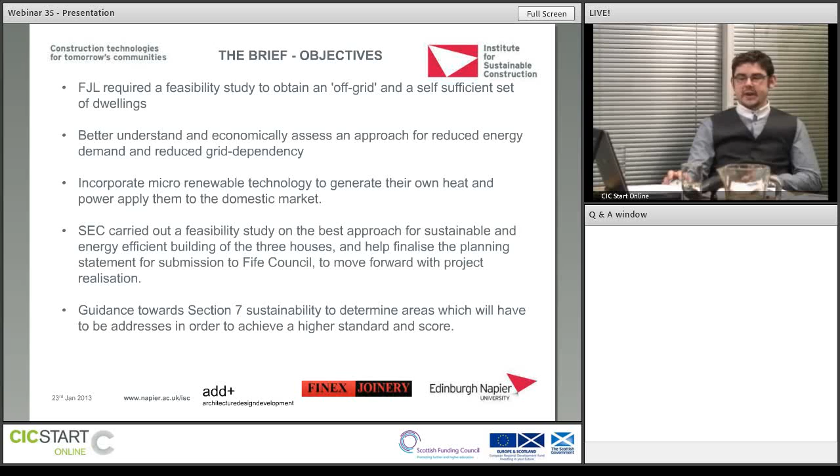So just now I'm going to pass over to Stuart Hannah from Allied Architects, and he's going to go through aspects relating to the site and to the design of the properties. Okay, thanks, John.

The first thing I'm going to speak about is why this site specifically was chosen. Finex are a Fife-based company, and they're well aware of Fife Council's ambition to be a green council, so Finex looked for a site within Fife.

There's several things that were looked at when selecting the site. Many sites proved unsuitable due to the urban setting - there's overshadowing, noise pollution, various issues like this. This site has a very open aspect, with southerly views, making it possible for PV panels, which was one of the first things they wanted to look at.

There is space on this site as well, space to trial different technologies. For example, if wind turbines were something we were going to look at, we had to be sure that it was something we could accommodate.

There are other features on this site as well. There's an existing reed bed next to the site, which is going to come into play as part of the drainage solution for the development. There are also services nearby - there's water on site, and there's also electricity adjacent to the site.

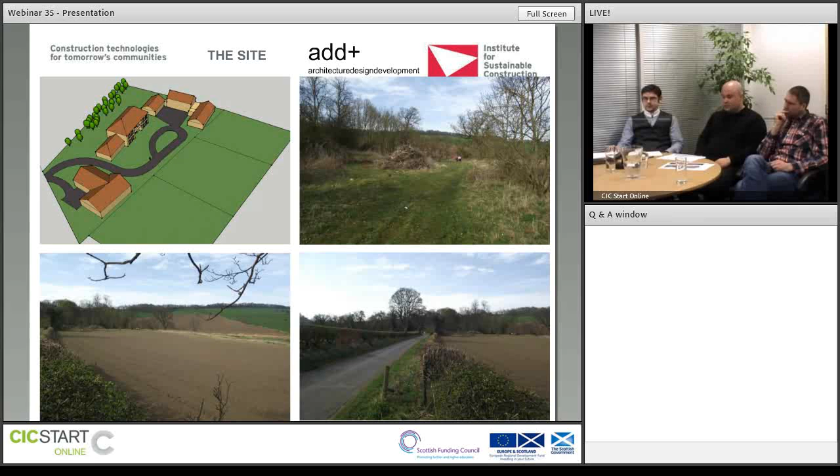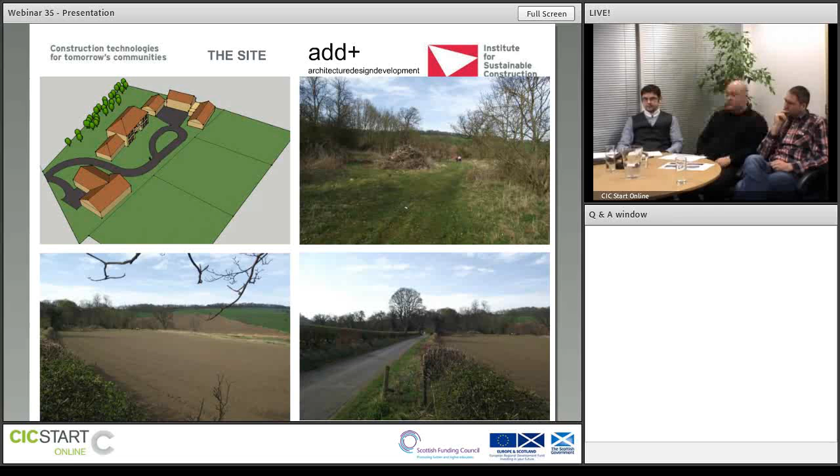The history of the site is quite interesting as well. It's a brownfield site, previously used as a World War II aircraft repair centre. You can still see the remnants of the foundations, although it's been slightly overgrown in recent years. Historically there were 3 buildings on the site, which lends itself quite neatly to what we're trying to trial here - we wanted to reflect the history of the site. There are 3 houses we want to develop, and there were 3 buildings previously on the site.

I'm going to look next at the dwelling design. What Finex were keen to do, and what I'm also keen to support them in, is that rather than having a typical modern looking energy efficient design, they wanted to show could traditional looking homes be built but with the same up-to-date standards and methods. They wanted to create a typical farm cluster which is common in the area around the site, and to fit in with the surrounding area. So really, to some extent, it's a modest approach that Finex were trying to take with regards to the site and the environment.

The site itself, when we're looking at a farm cluster - there's the main house, elevation 1, which is a big house. It would use the Beattie Passive system. There's the big house, there's the farmhouse, again a kind of traditional typology with outbuildings etc., and lastly there's what we've termed the gatehouse, right at the entrance to the development.

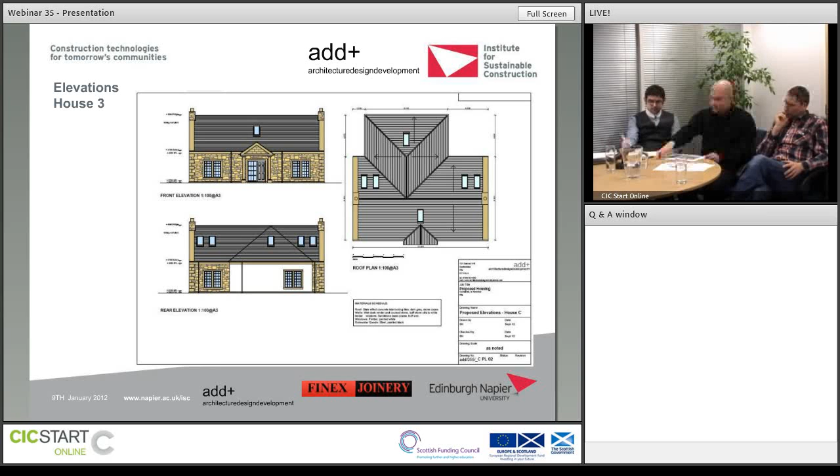You can see the elevations here. Moving through to the arrangement of the cluster - they've been arranged in such a way as to be a typical cluster development, and as I say, in the surrounding area there are several of these already in existence. So we're not trying to do anything alien in terms of its setting, but rather we're trying to complement what's there, while at the same time doing something thoroughly modern and, as far as we understand it, unique at the moment.

So I'll move on to the building systems which have been chosen. The first system, for the biggest of the houses, is the Beattie Passive system. The farmhouse is to use the SIPs panel system, and lastly the third method selected was an augmented timber kit. I'll just spend a moment talking about the Beattie Passive system.

It's a system relatively new to the market, and there have been some houses finished in the Fife area using this system. The main feature of the Beattie Passive system is the continuous building insulation envelope - as far as I'm aware, only the Beattie Passive system has this. It's the lack of, or minimisation of, cold bridging which is its main feature. It is also a certified construction by the Scottish Passive House Centre, and it was the first system, as far as I'm aware, to achieve this accreditation.

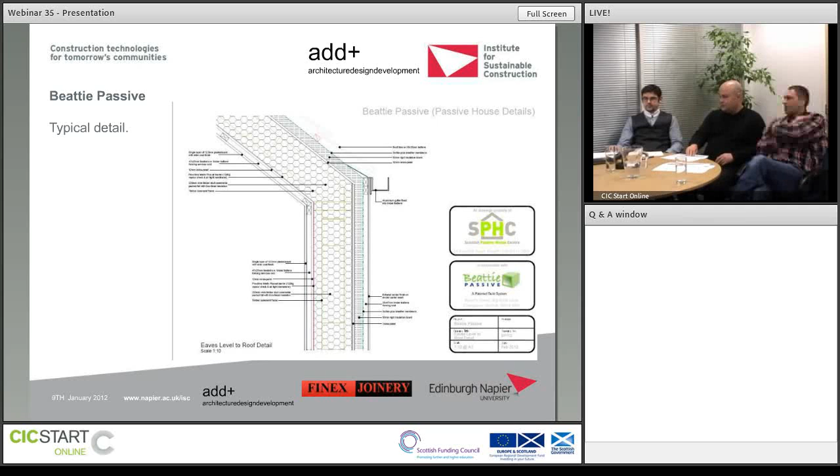So that's what we're going to be using for the first house. There's a slide showing a typical detail through the building envelope, and as you can see, from roof to wall, there really isn't much different. It's a continuous building insulation envelope, timber frame, or a variation of a timber frame with a large void which is filled with insulation.

The next system to be used, on the second house, the farmhouse, is the SIPs panel system. Again, it's not as new to the market. In fact, there have been SIPs systems built in this country for around 40 years now. The main feature of the SIPs system is it's an off-site prefab panel system which would minimise construction time on site. Again, it has high insulation values, as does the Beattie Passive system.

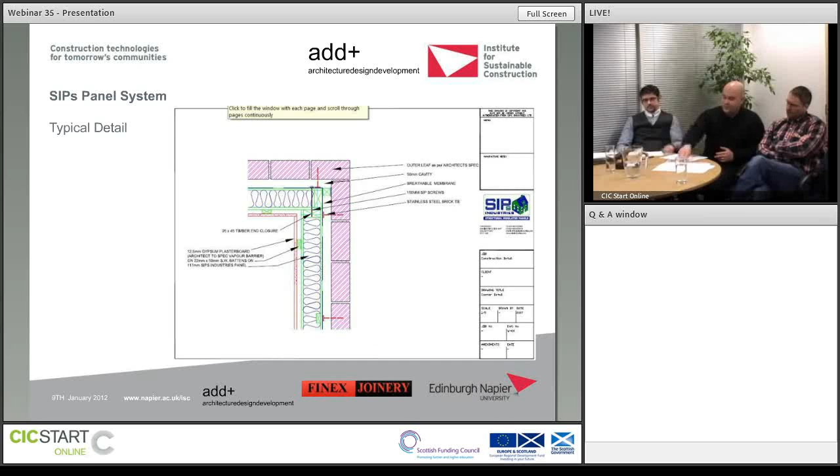The last system we're proposing to use would be an augmented timber kit system. The reason for using that was that timber kit is fairly traditional in the area we're going to be building in. It's a construction technique most are familiar with, so really what we're looking at is taking a traditional timber kit system and augmenting it to a level where it has a higher insulation value. In this case, we're proposing to have an offset stud, again to increase the insulation void.

In the case of all three systems, what we're looking at also is very good airtightness. So really, in terms of the building, the main drivers in design common to all three systems would be good airtightness and good thermal insulation.

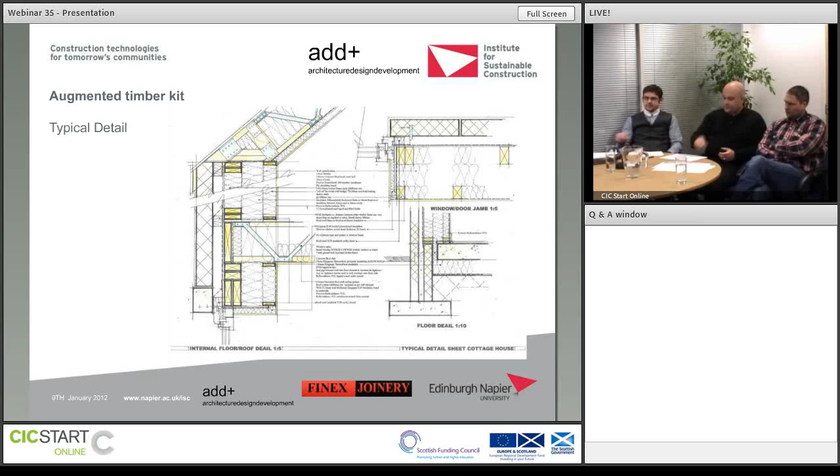Before I hand back to John, I'll quickly tell you about the need for the study. The first thing is Finex were looking for independent expert advice, and they were introduced to Napier University through Fife Council's Building Standards Department. They were aware of lots of claims on performance and wary that some of these may be sales driven for the various sustainable technologies out there.

So really what they were looking for was an independent voice in the midst of all the choices that were there. Initially it started as an aim to build an energy efficient home, and then it developed into a desire to be off grid.

As Finex, and many of us, are new to this type of technology and unaware of everything available, they thought it would be good to turn to the Institute for Sustainable Construction to look into this with us. But we would also be unable to predict how these houses would perform, so we're interested in a feasibility study, to assess whether the site was suitable for some or all of the technologies out there, for example wind turbines, PV panels, that sort of thing.

I'll hand back to John now, who I think is going to talk more about the report. Good job, thanks Stuart.

I'm going to go through briefly the methodology set out for how we were to investigate these three dwellings that Stuart had designed. Essentially, Stuart had adopted a very strong fabric-first approach to all three dwellings, as you've seen from the slides.

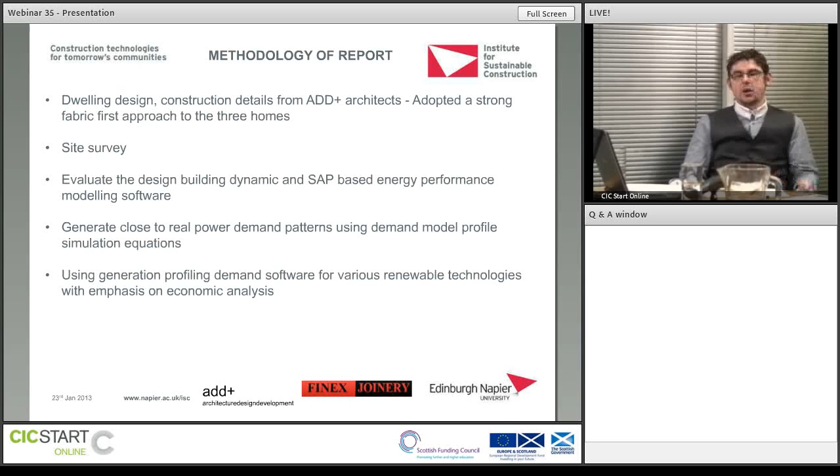So once we arrived at the site, as Stuart mentioned, we established that there's no immediate mains gas or electricity connection, so we were looking essentially off-grid.

Looking around the site and seeing the lie of the trees and the local surroundings, we could rule out a number of technologies pertaining to wind and hydro, for example.

We also had access to an adjacent site to where the houses are proposed to be built, and this site was going to be able to house technologies and allow for maybe a much larger farm-type establishment of different technologies.

And the report then speaks a bit about the foreseeable issues relating to living off grid and the challenges of providing sustained, continuous electricity supply to a house all day, all year long.

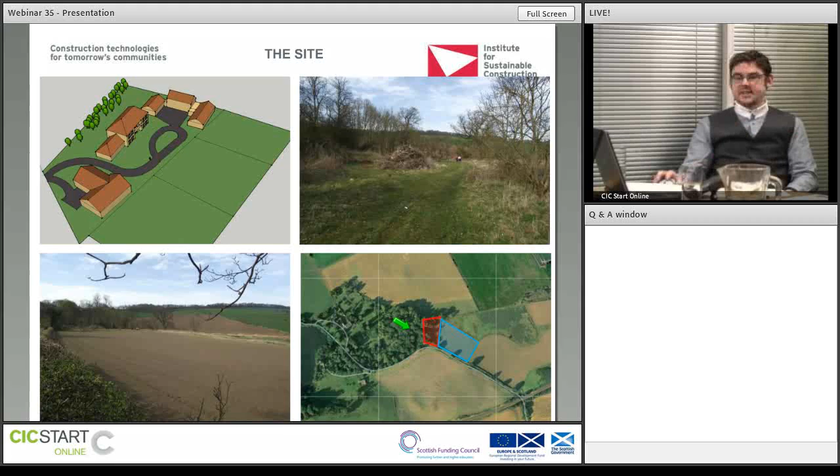And the reason I mention this is our feasibility study was essentially looking at the first three aspects. This slide has changed - anyway, we have the first 3 aspects, which I don't seem to have here on my slide for some reason. The first 3 aspects relate to the carbon dioxide emissions based on the DER against the TER.

Aspect 2 is the space heating requirement, kilowatt hours per metre squared per year, and the third aspect was generating hot water based on renewables or recovery on site. So out of the 8 aspects, we looked at those 3 as benchmarks of performance to compare the 3 designs, and we omitted the other 5 aspects because they're more design based - looking at acoustic performance, materials selected, low flow water taps, accessibility, and flexibility of design space, which is really within Stuart's remit. So we were looking specifically at what those buildings were in those 3 aspects.

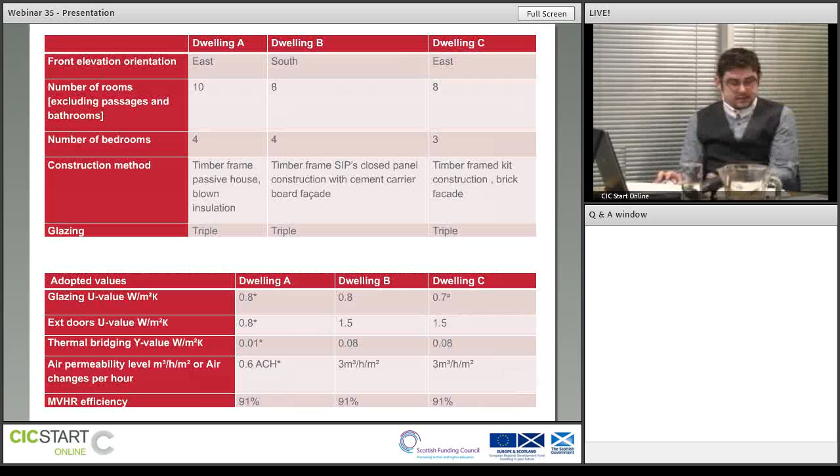There we go, that's the reason why I missed a slide. So these are each of the designs that were put into the modelling software. The parameters or categories based on each individual building component, or the U value, whatever it may be, was either pre-selected by Stuart or by Drew about what the value should be for the openings, the doors and windows, or what the air tightness level should be, or whatever relating to those.

Dwelling, the first dwelling we have marked as dwelling A, was that property designed under the Passive House standard that Stuart mentioned. Passive House has quite a rigid design parameter when it comes down to heat loss, so those values chosen in the bottom table come from what the design standards were within Passive House. The values chosen to design, to virtually construct the models for B and C - what I really want to focus on here is our thermal bridging and air permeability levels.

These are values that can essentially be manipulated, or kind of massaged if you like, within different modelling programs. Based on these values, you can essentially hit or miss a gold level standard by a couple of kilowatt hours per year per metre squared, based on what these values are. The values we chose for B and C under those parameters essentially come from what we have experienced in our post occupancy evaluation or building performance evaluation.

Their air permeability values, for example, were set at 3, and that essentially comes down to what we think, from what we have experienced, can be achieved realistically on site using modern methods of construction. These values will also have to be proven through completion testing. So the values put in here can bring down your annual consumption and heat demand, but also need to be justified at the end. The values here for thermal bridging were also set within what we expect to see, constructed simply on the back of virtually building these up within a certain modelling program.

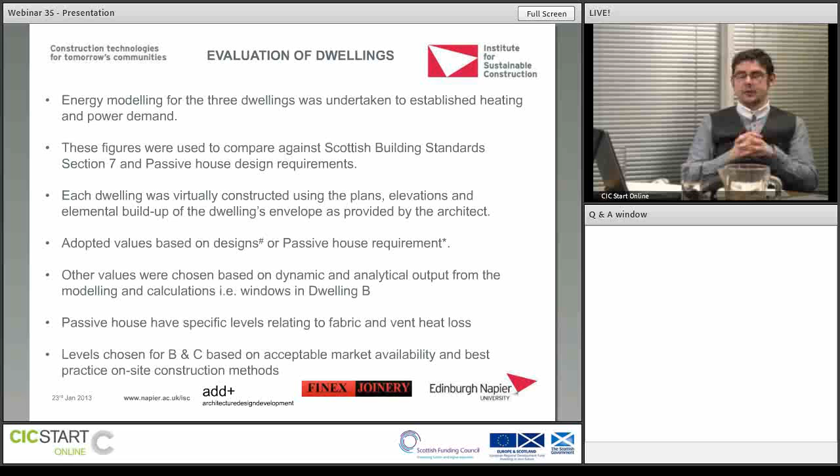So, like I mentioned before, we virtually constructed the 3 dwellings in 2 pieces of software. One was a dynamic modelling software, the other was an analytical or numerical piece of software. We noticed the outputs from both types produce slightly different results when it comes to the space heating requirement - the numerical modelling produced a much lower value, whereas the dynamic modelling produced a slightly higher value for various different reasons. That outcome influenced the rest of the feasibility study. We'd foresee the dynamic modelling being quite close to what we expect when the houses are constructed and how they'll perform, but ultimately it's the numerical modelling which is going to be used to achieve Building Standards Section 7, and that's what's going to be compared against what the houses consume. But we were using the dynamic modelling output to size our renewable technologies, which we'll come to in a few moments.

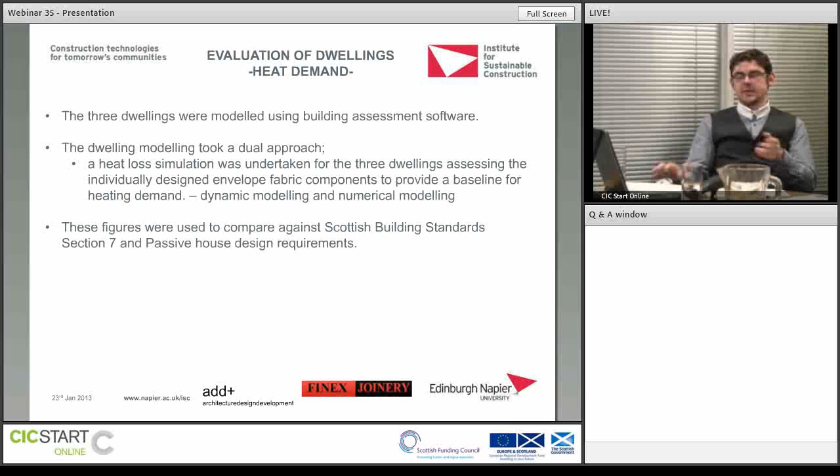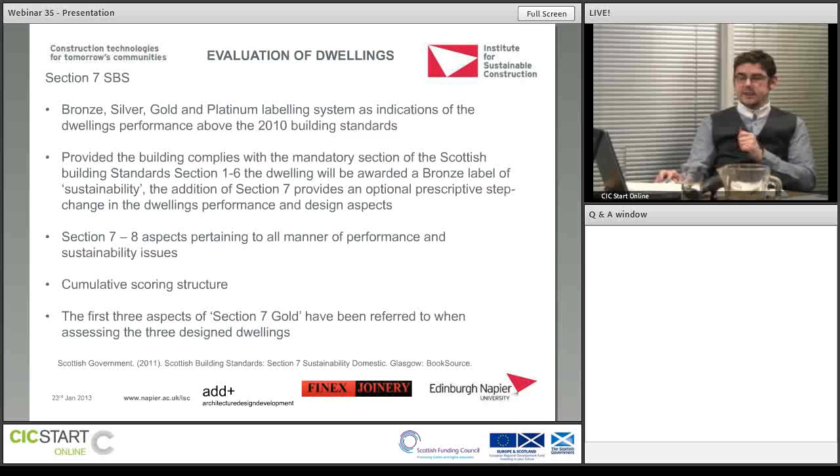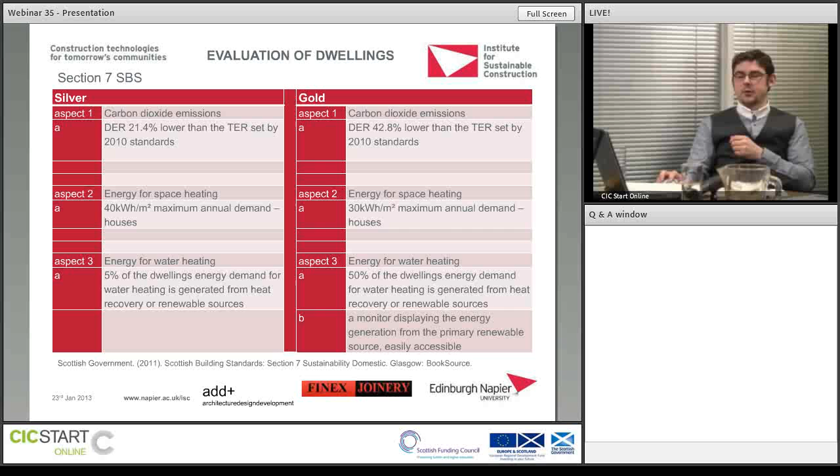So I went through that slide earlier about what Section 7 is, and there's my slide there about the 3 aspects. I'm not going to go through that again - that's simply for those who are looking to see a bit more on the Section 7 three aspects we're demanding.

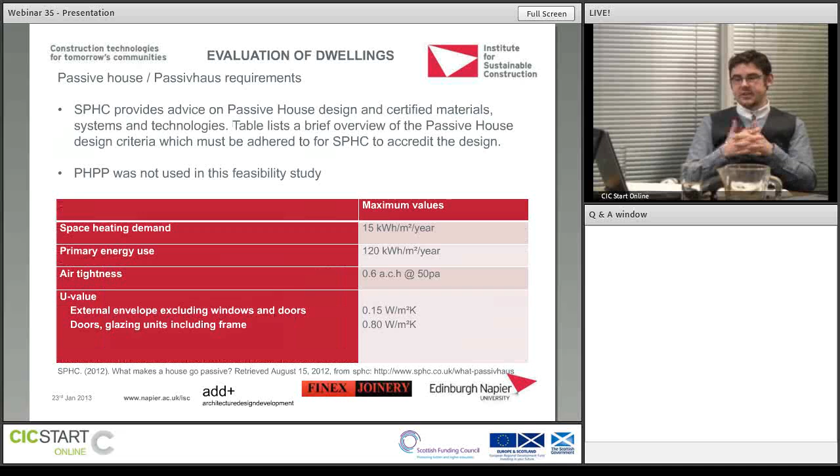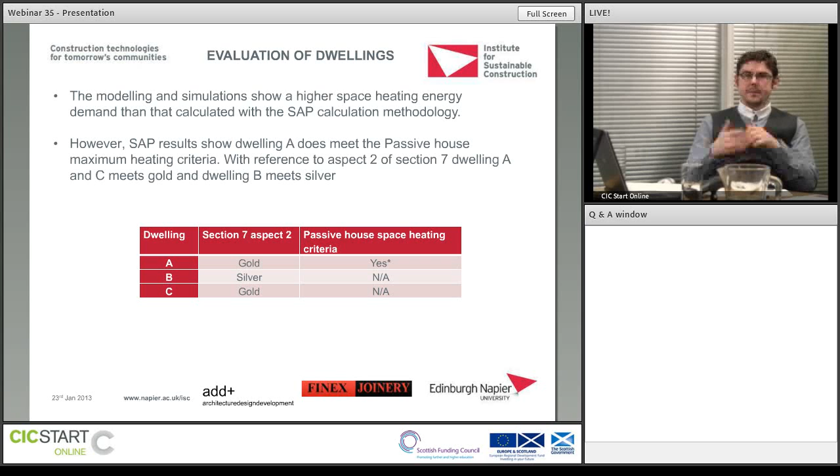This is the table that was provided to us by the Scottish Passive House Centre - the values we used to construct the first dwelling, the passive house dwelling. Out of the numerical modelling, dwellings A and C achieved gold under aspect 2, under 30 kilowatt hours per metre squared per year heat demand, whereas B was slightly higher, just below 40, putting it in the silver category. The report goes on to say how we can manipulate building B to perhaps achieve that aspect for Section 7, which we'll come to towards the end of the presentation.

Now I'm going to speak a little more about how we calculated the power demand, or electricity required for the houses. What's important to mention is the complexities when sizing technology to sustain off-grid properties. A lot of the work we've done in the past with energy monitoring has shown that a large part of the generation for electricity is going to be during the day, but a large part of the demand is most likely going to be in the evening, or even parts of the year where the sun is at its lowest.

So the overarching goal was to provide off-grid solutions. What we had to do was find or develop a program to look at the occupancy pattern and try to gauge a good understanding of what the power demand will be.

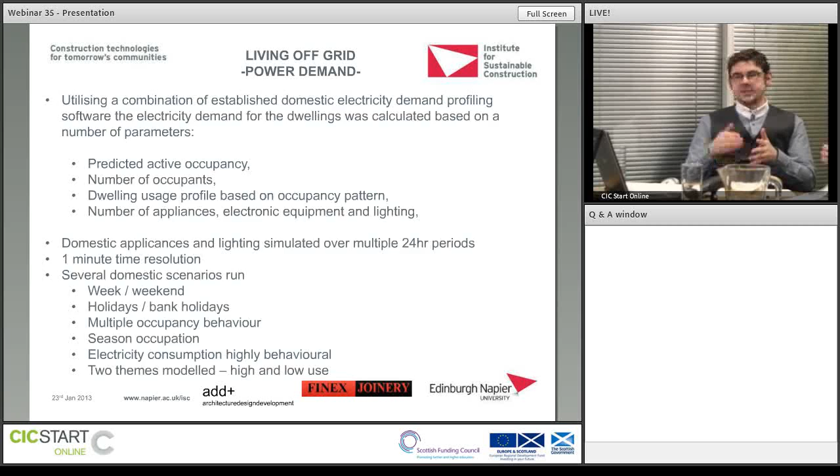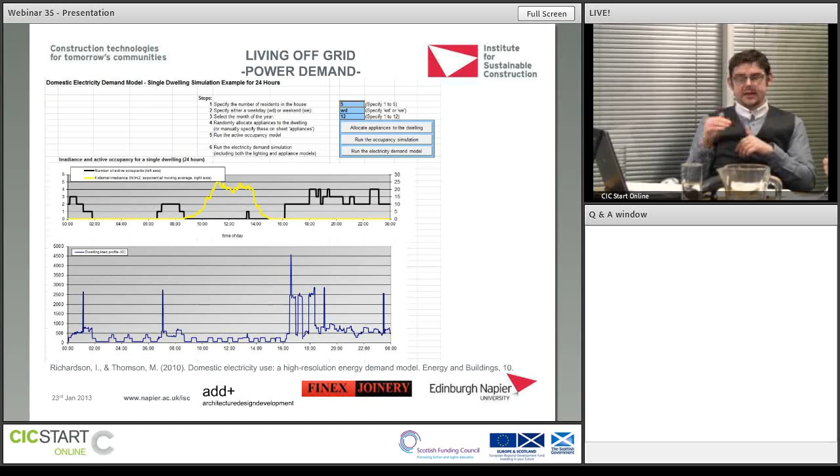Using a software calculator tool developed by Loughborough University, which we manipulated to our own needs, we were able to predict the active occupancy and look at a number of parameters based on what Finex and AD had provided us - the number of occupants, the appliances - and we began to simulate scenarios of when and how these are going to be used, how energy efficient each appliance was, and developed different scenarios based on different times of the year and day, ultimately trying to achieve a peak energy demand, a baseline energy demand, and a yearly consumption figure to move forward and design the different technologies.

So what we did, and thought was prudent at the time, was to develop two profiles - a higher model profile and a lower model profile. This was based on behaviour monitoring with energy monitors in the past, where we see different trends within people's behaviour based on how they interact with their relationship with energy.

So what we did essentially was look at an energy frugal family going into these homes, keen to reduce their consumption, change their behaviour, and modify their habits based on the fact that they are living off-grid and lifestyle changes will have to be made. We also felt it important to look at a family who were living on-grid, who came off-grid and brought a lot of their habits and habitual routines with them.

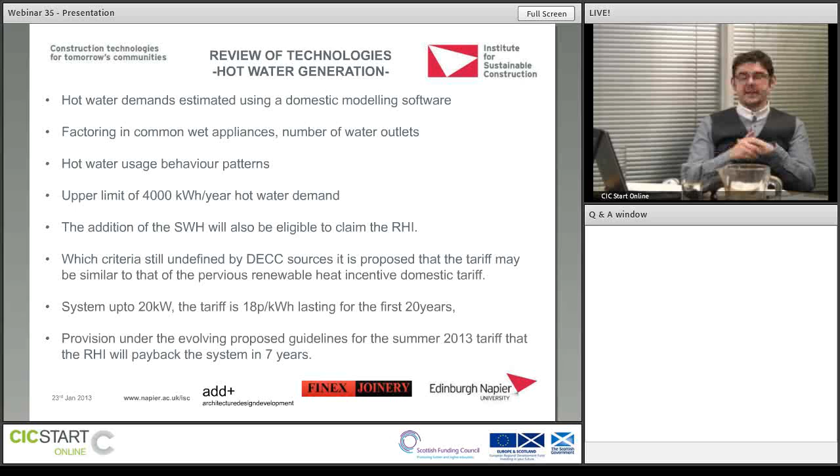Again, this is simply just a breakdown of the system that was chosen for the site. That's just there for those who are interested in any great detail.

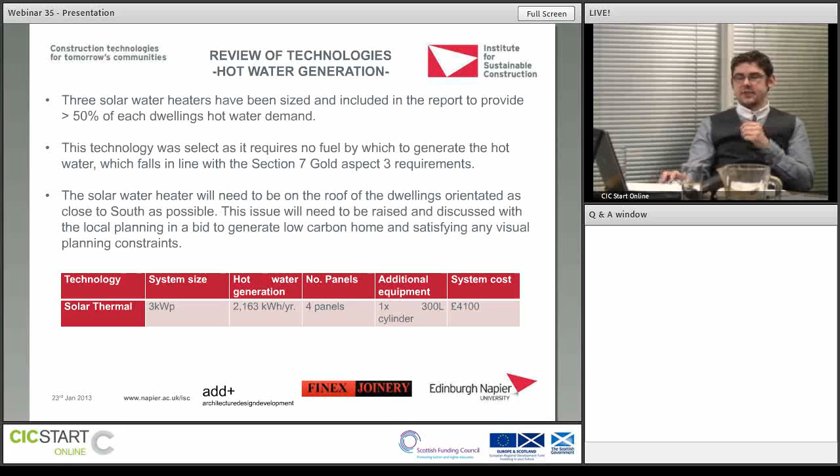Looking now at the systems chosen for power generation, for off-grid power generation we looked at PVs with a battery bank, and a quite substantial, healthy PV farm that was built. It was going to be erected at the site adjacent to where the houses are going to be built, and this came back to what Stuart was saying about having homes that satisfy all the energy efficiency requirements, satisfy the desire to have renewable technology, and at the same time maintain this traditional facade. One of those parameters was trying to keep as many of the technologies off the roof and off the main building as possible.

So what we then went on to do is size the PVs based on the generation we thought was applicable using the power generation modelling tool, and then ran that through an economic assessment based on what the system would be achieving financially through the government incentive. We also looked at costing the system and having a capital expenditure based on the return on the system.

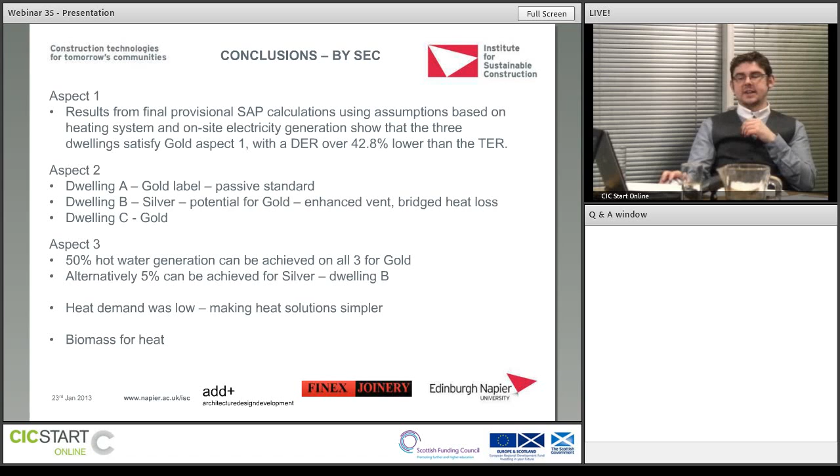So that's all I have to say on the conclusions for our aspect of the report and the feasibility study. All of these things have been translated over to both Finex and AD Architects through the report. Now I'm going to pass back over to Stuart, who's going to speak a little bit about how they're going to move forward with the plans and the recommendations, what their thoughts are, and the future for the site and the three dwellings.

Okay, thanks John. Just to update as to where we now are: we've received the report and we've been digesting the information. Following the report, Finex are now in consultation with two energy consultants, looking into the recommendations and weighing up the cost implications of various technologies.

One significant aspect to come back from the report was the desire to be off-grid. That's something which has now been reviewed. It would appear that it makes a lot more sense to have a grid connection, at least from the point of view of feed-in tariffs, but also the start-up costs, the capital costs of investment in technologies, and the payback period. That has certainly influenced our thinking moving forward.

We're currently assessing the practicalities of storing electricity to minimise grid use, but again, as we've heard from John, having the grid as backup is something that is now coming into our thinking.